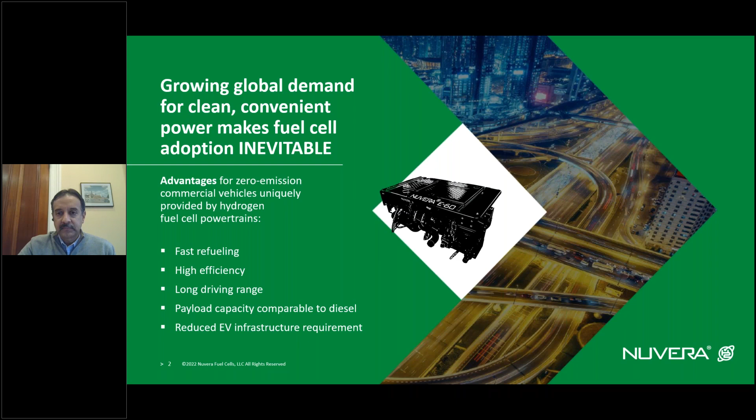The key, if you think about a fuel cell engine compared to an IC engine, is really about reliability. Today you get into your car, be it gasoline or diesel, and 99.9% of the time, it starts up - no issues. Fuel cell technology is a bit temperamental, so the key in the industry is really, can we match the reliability of an IC or diesel engine?

So if you think about hydrogen fuel cell engines, this is what we make today. Think about hydrogen as portable electricity. Hydrogen is carried as a fuel, like petroleum and natural gas, and it's used to refuel a fuel cell vehicle in the same amount of time as it takes to refill a diesel vehicle.

Compared to batteries, hydrogen has much more energy density, and as a result, electric fuel cell vehicles generally have a greater range than battery vehicles.

What you see here on the right-hand side is what we call the Nuvera fuel cell engine. Fuel cell engines are measured in kilowatts, and this is an example of our 60 kilowatt engine. Think of this as the engine block in your car. If you took your engine block out, or built a vehicle with a hydrogen fuel cell engine, you would still have to add the radiator or thermal management, a battery, and all the control systems that go with the vehicle.

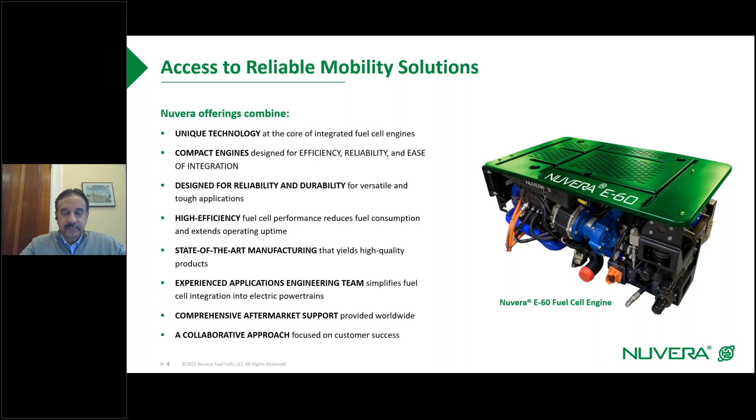So a bit of history again about Nuvera. Founded almost 22 years ago, we have over 800 patents in fuel cell technology, and we've done a lot of projects over the years, from several automotive vehicles to buses to tractors. Today our technology is commercial in forklift trucks around the world. We have a bus that's running in China and one shortly to be running in India. And then we're focused on ports. The reason we're focused on ports is that's where a lot of diesel is used today, and it's a very ripe opportunity to go to zero CO2.

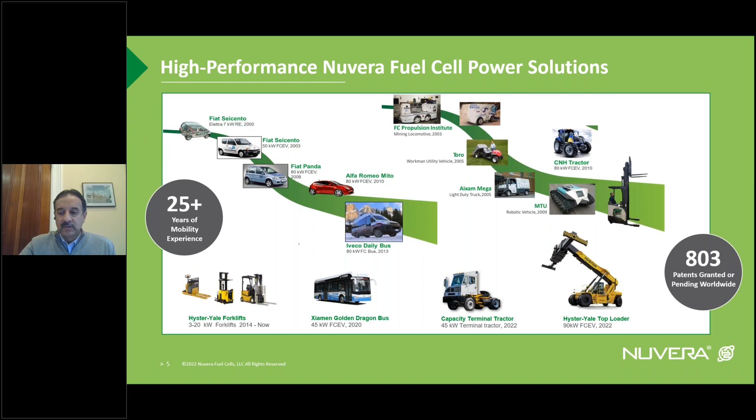Nuvera is a global company. We're part of a $3 billion US company called Hyster-Yale, a world leader in material handling, so forklift trucks and equipment that's used in ports. Nuvera is headquartered in Boston, where we have our manufacturing. In Europe, we have an engine testing facility near Milan. And we have application development and technical service in China. As part of the Hyster-Yale network, we have a full dealership network that we can leverage around the world to support customers.

So I wanted to get into why hydrogen for transportation, right? This is an important thing. Hydrogen based fuel cell technology is currently generating significant interest across multiple industries, as companies worldwide look to lower the carbon footprint of their operations, due to internal goals, stakeholder demands, and regulatory pressures to reduce CO2. In addition, hydrogen is the lightest element and the most abundant chemical substance in the universe. In standard conditions, it's present as a gas of diatomic molecules consisting of two hydrogen atoms, and is a highly flammable substance that can be used directly as a fuel to generate electricity in fuel cells.

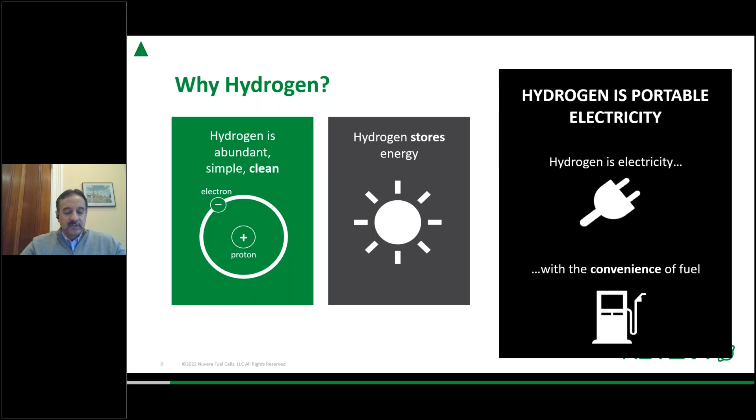Today, electricity is an energy carrier. Electricity can be made from many diverse feedstocks, from solar to nuclear to hydro to natural gas and coal. Today, electricity is primarily for stationary applications, so for powering our homes and our factories. Electrical power is distributed through a grid to homes, businesses, and factories. For many uses such as electronics and other devices that don't require a great deal of power, batteries are the practical energy storage device today. But for larger applications like vehicles, long recharge times and low power density make their use on industrial equipment, trucks, buses, and automobiles limited or impossible.

Petroleum is the dominant energy source in our world today for transportation because it's energy dense and it's portable. We all know, and we've all heard stories of the oil embargo, the energy crisis. However, the fossil fuel era is coming to an end. Not only are coal, oil, and natural gas becoming scarcer and more difficult to extract, but their extraction and use are taking a tremendous toll on the environment. So what are the best clean transportation options emerging now?

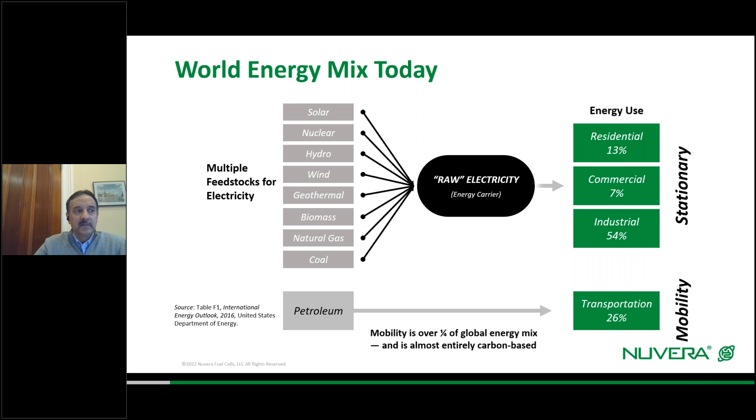So in terms of hydrogen, hydrogen is an alternative energy, as I mentioned, and there are various types of hydrogen. If you think about hydrogen today, the most prevalent use of hydrogen is in the refinery industry, for refined oils, and also in the steel industry. It's also good to differentiate the various types of hydrogen that industry is working on today. The most prevalent today is what we call gray hydrogen. It comes from the cracking of natural gas, called SMR, steam methane reformation, where steam and methane are combined under pressure to generate hydrogen. This releases the greatest amount of CO2 in the world today.

So in terms of what's the best technology today - if you think about the challenges the industry has, charging your battery-powered vehicle is 20 times slower than using a hydrogen charging vehicle. The convenience penalty for using electric vehicles can be represented as time spent charging the battery divided by time spent using it for its intended purpose. The convenience penalty for a gasoline-powered vehicle is about 0.5% - you can drive a mid-sized car about 16 hours for the 5 minutes it takes to fill it up. Battery electric vehicles have a much higher convenience penalty.

The best superchargers today have 100 kilowatt capability. That makes the convenience penalty for charging a mid-sized car about 10%, which is 20 times higher than for a gasoline-powered car. The penalty is even higher for a large SUV, most prevalent today in North America. Most EV owners don't have access to superchargers - they charge their car at home or at work. For a 240 volt charger, the convenience penalty is 100%. For a 120 volt charger, it's about 1,000%.

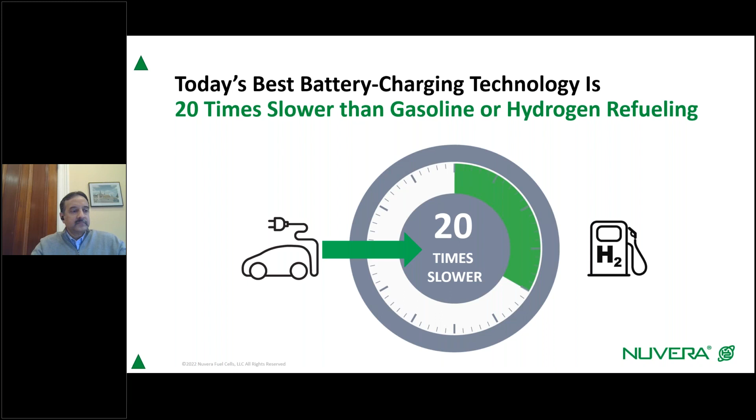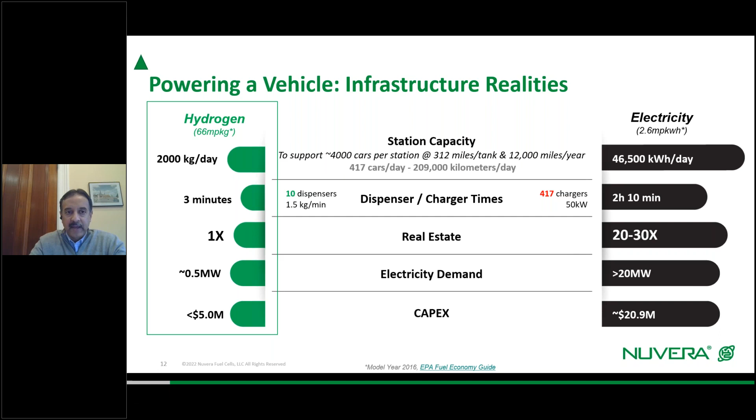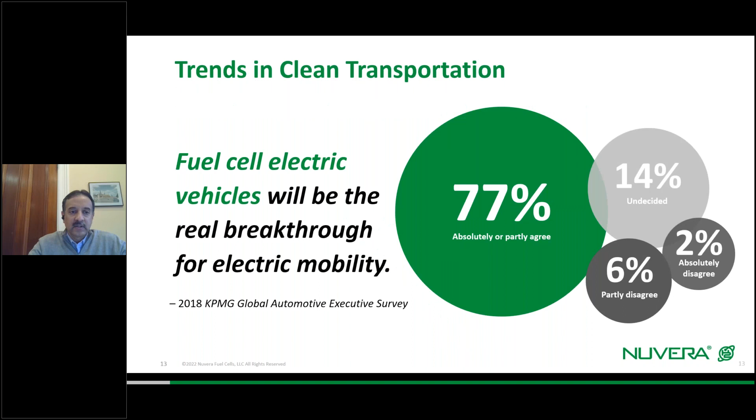So trends in clean transportation: basically the fuel cell vehicles could be a real breakthrough for electric mobility, and mostly people agree to that. So considering hydrogen mobility needs, which direction would we be moving in? Zero energy emissions.

Hydrogen can be produced from unlimited sources, as I mentioned, and it has zero tailpipe emissions. This is really the one way the world can get to zero CO2 emissions. Electricity stored as hydrogen provides the convenience of today's transportation fuels - hydrogen refueling is much faster and more flexible than battery charging.

But today, if you think about battery charging, we still all have range anxiety in terms of where we're going to charge our car, and whether charging will be available when we need it. And why should we have to wait, versus our IC vehicle, when we can fill our tank in less than 5 minutes? These are still challenges that both the battery electric vehicle industry and the hydrogen industry have to overcome.

Fuel cell vehicles can be developed at scale today. We see that in parts of the world where Toyota, Hyundai and Honda have fuel cell vehicles on the road, and hydrogen is available. But if you look at that, you're still limited, because hydrogen is only available in those locales where those cars are sold.

There's no need to change the current vehicle ownership model. We see that happening again with Honda and Toyota, which are selling these cars through their current dealer network. It's convenient and safe, and you can refuel a hydrogen vehicle very quickly.

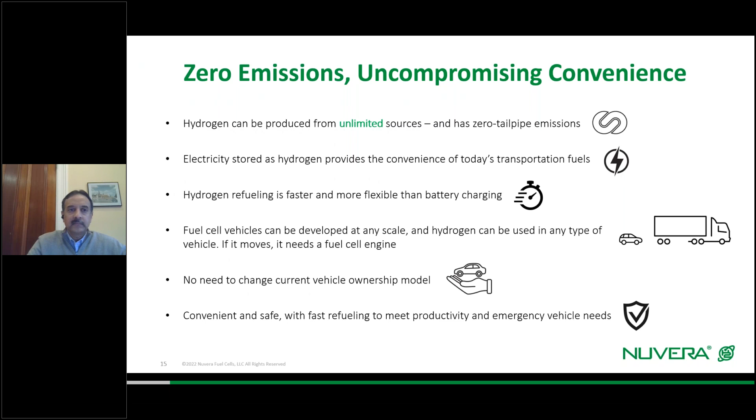Hydrogen adoption is rising - this is what we're seeing around the world today. Buses, delivery trucks, and forklift trucks constitute the first wave of deployments for fuel cell transportation. Fuel cell powered vehicles also have the potential for larger operating ranges, as well as refueling times that are significantly faster than the charging times for battery electric vehicles. With refueling times comparable to traditional diesel powered vehicles, long refueling or recharging times do not need to be designed into the daily operating schedules of equipment fleets.

What we see today in the industry is there are now over 20,000 forklift trucks operating on what we call a battery box replacement, where the lithium-ion battery has been replaced with a hydrogen fuel cell. It's captive within a warehouse or within a port location where there's accessible hydrogen, and these are being used on a daily basis and emitting zero CO2. Automotive OEMs are introducing fuel cells in China, Japan, South Korea, and in the US.

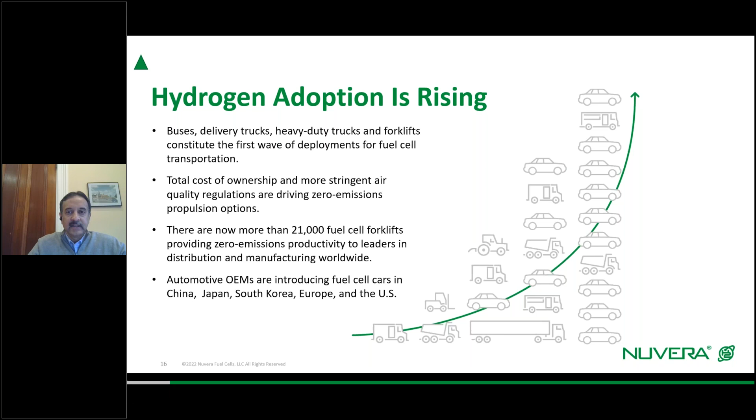Nuvera is building the hydrogen economy. We're trying to bring innovation and value with a diversified portfolio of products. We're engaged with industry associations around the world to promote the clean use of hydrogen fuel cells, and we're involved with codes and standards development. As with any chemical industry, codes and standards have to be developed over a period of time, and the industry is working towards standardization of these types of things.

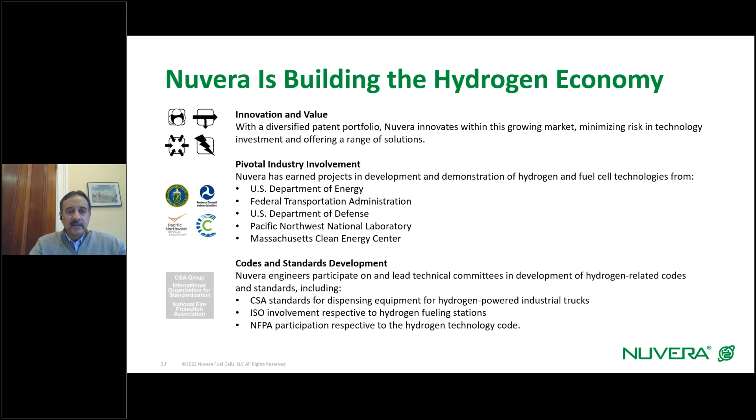Next, I want to move on to fuel cell theory - what is a fuel cell and how does it work. Fuel cell technology today is really a branch of electrochemistry, the branch of chemistry that deals with the relationship between electrical and chemical phenomena. It's a chemical reaction that happens, and it includes a number of disciplines, from chemical engineering to mechanical engineering to thermodynamics.

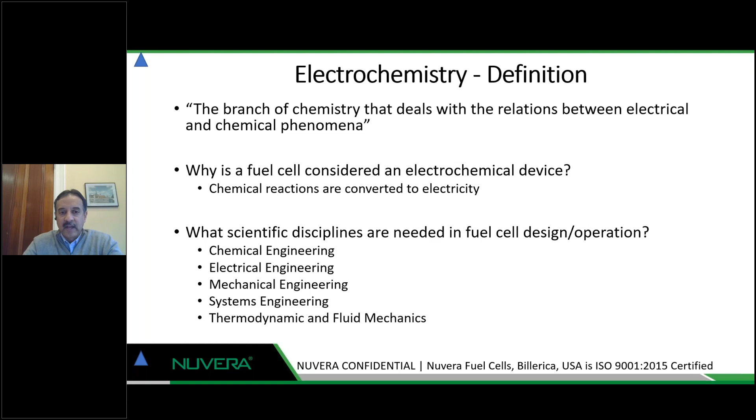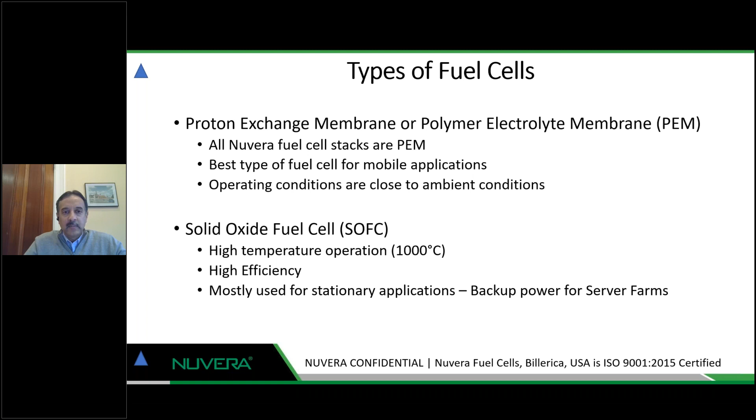Basically what happens in a fuel cell, you have a proton exchange membrane or a polymer membrane, and at Nuvera we call these fuel cell stacks. We'll go into the details of what this involves. There are two types of fuel cells: one is a proton exchange membrane that's based on a catalyst, platinum, and then a solid oxide fuel cell that operates at very high temperatures and is mostly used for stationary applications, like backup power for data centers.

So what is a fuel cell? The input is hydrogen, as we talked about - that's what's really driving the economy. So hydrogen and air are the inputs. The outputs are electricity, heat, and water. The only byproduct of a hydrogen fuel cell is water, in terms of vapor or water that's left on the ground while a fuel cell vehicle is in operation.

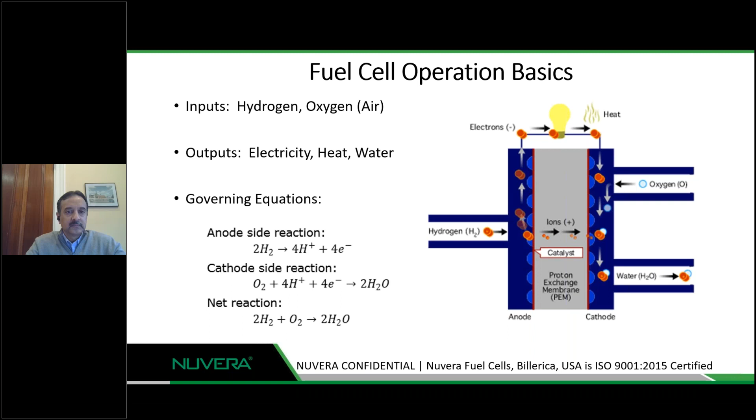Fuel cells come together under compression and pressure to increase the power output. Depending on the number of repeating components, which you can see on the right-hand side, we make fuel cell stacks anywhere between 55 cells and 383 cells. That determines the amount of power that comes out of the cell - the larger or the more repeating components, the higher the voltage. But that also creates reliability challenges, as you can imagine.

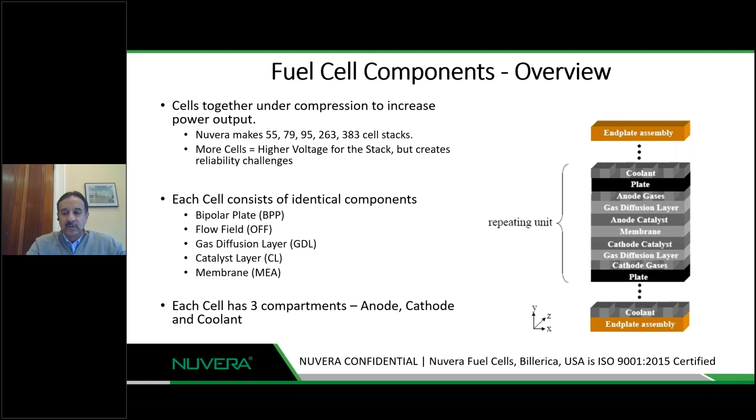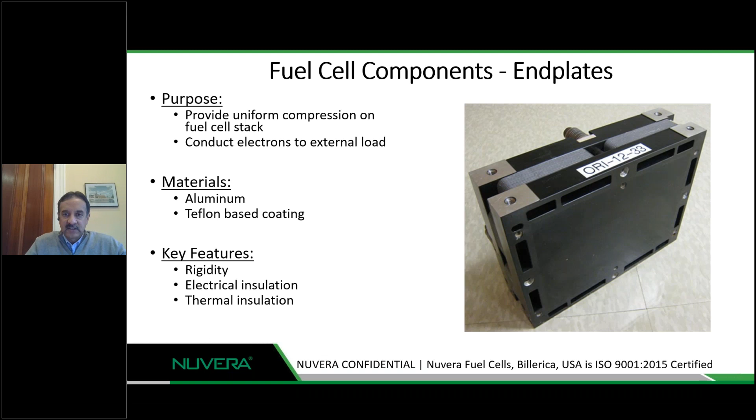Each cell consists of identical components: a bipolar plate, a flow field, a gas diffusion layer for the hydrogen to diffuse through, a catalyst layer - typically platinum, so fairly expensive - and a membrane. Each cell has three compartments: an anode, a cathode, and coolant. These fuel cell stacks are put between two end plates, which compress the fuel cell stack to allow the flow of hydrogen and air through the membrane. These materials are typically aluminum and Teflon, providing rigidity and electrical and thermal insulation. What you see on the right-hand side is a very short stack that generates about 5 kilowatts of energy, and it is about 10 times as large to generate 60 to 80 kilowatts.

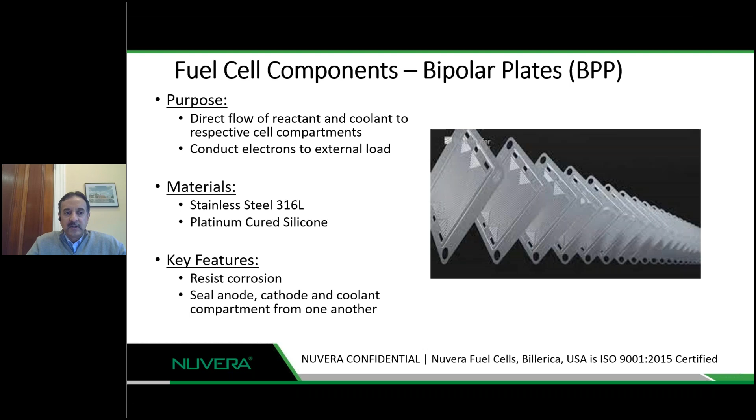The purpose of each component - it's important to understand from a technical perspective how each of these works. Bipolar plates direct the flow of the reactants and the coolants to the respective compartments within the fuel cell. These are typically made out of stainless steel, or they could be made out of carbon fiber, and they're typically corrosion resistant because you have coolant running through them, and they're sealed.

Open flow field - this is to diffuse the gases or the reactive gases from when the hydrogen reacts with the platinum catalyst. These are typically made out of nickel, chromium, and/or graphite. The purpose is to maintain the permeability of the compressed stack under pressure, to avoid corrosion, and to have low bulk and interfacial resistance.

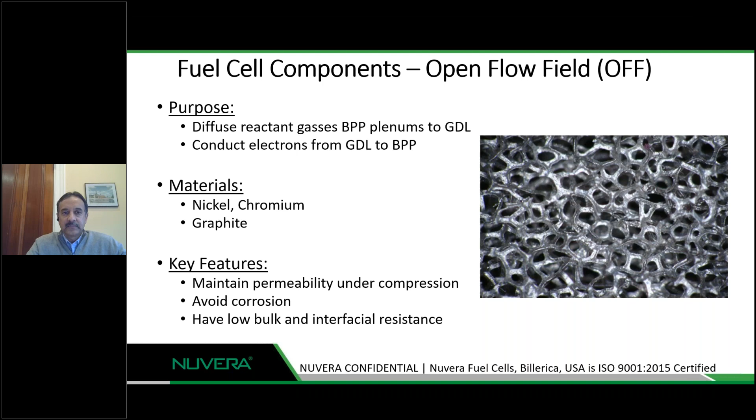Fuel cell components - gas diffusion layer. This is an important component because it diffuses the reactants from the flow field to the catalyst, and it conducts the electrons off the catalyst to generate current. These are typically made out of Teflon or carbon fiber, and they're used to prevent the puncture of the MEA.

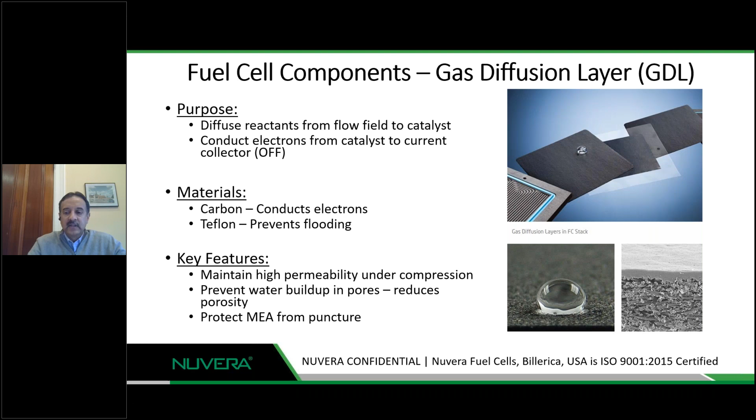And then finally, the catalyst layer. The purpose of this is to facilitate the reaction between the anode and the cathode. And these are typically made out of platinum, carbon, or Teflon.

So as you can see, many of the components that are used here are fairly expensive, and the typical cost of a hydrogen fuel cell in terms of dollars per kilowatt is in the range of $1,000 per kilowatt, all the way up to about $1,500 a kilowatt. So something that is a 10 kilowatt stack could cost $10,000, and if you're at 60 kilowatts, it could be almost $70,000 to $80,000.

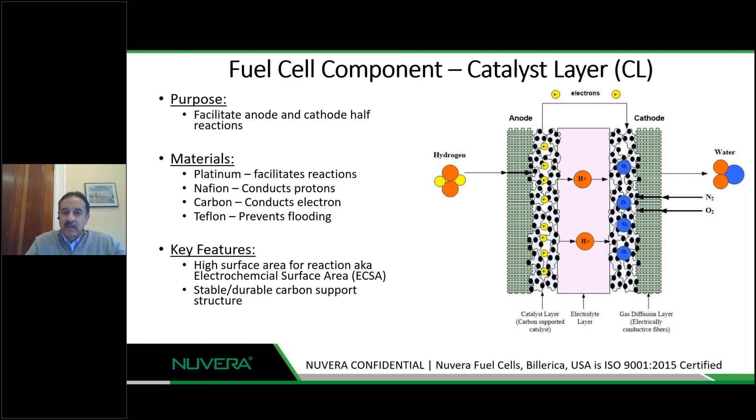So this is a fairly expensive technology, which is one of the barriers that I think people have today with adopting the technology. And then the fuel cell membrane.

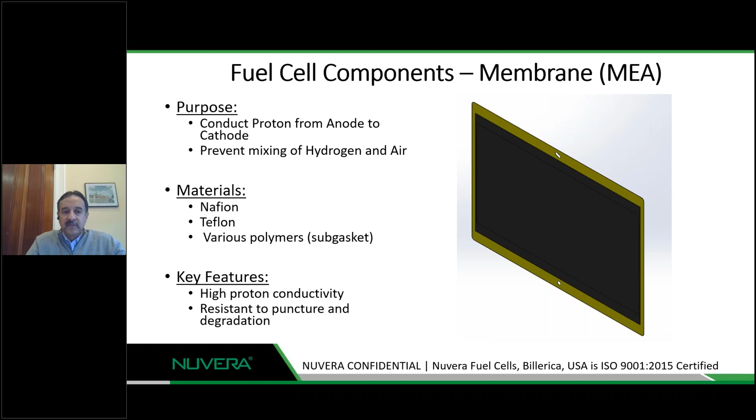The purpose is to conduct the proton from the anode to the cathode. It's also used to prevent the hydrogen and the air from mixing within the fuel cell components. And again, these are made up of Teflon and various other types of polymers, and they're used to prevent puncture and degradation.

And then in terms of measurement, what's measured, the typical way of measuring a fuel cell stack is what we call a polarization curve, which shows the fuel cell output voltage over its entire range of current density. Our cells today are designed for between 0 amps per centimeter squared up to 2.5 amps per centimeter squared.

And there are three types of fuel cell losses. You get activation loss, ohmic losses, and mass transport or concentration loss.

And typically the efficiency of the fuel cell compared to a diesel engine: a diesel engine is about 30 to 35% efficiency, which is the conversion of the amount of diesel that you put into the engine to the amount of power that you get out. In a hydrogen fuel cell, you can get anywhere from 58 to 65% efficiency. So the conversion of hydrogen is much higher in a hydrogen fuel cell than a diesel vehicle.

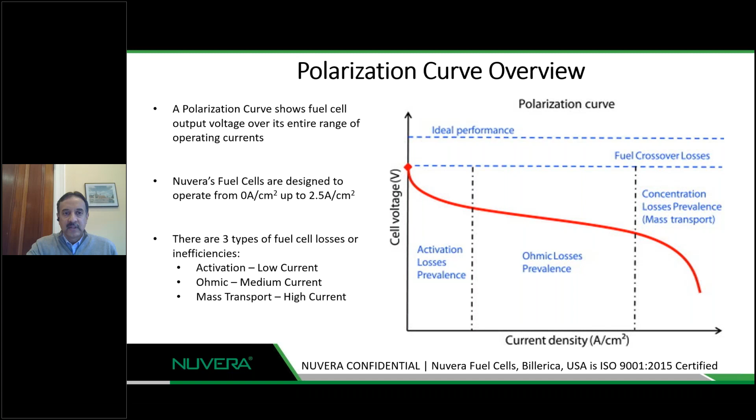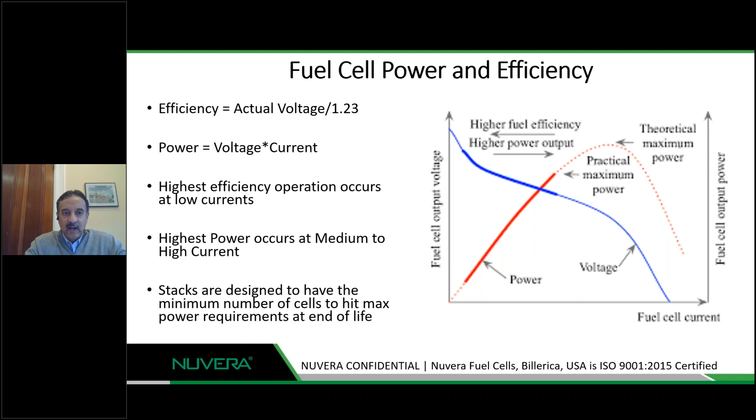And then power, fuel cell power and efficiency is measured over time. The highest efficiency operation occurs at lower currents, and the highest power occurs at medium to high currents. And then fuel cell stacks are designed to have minimum number of cells to get the maximum power. So the more repeating components or cells in the stack, the higher the power, but also the challenges of reliability and operability with the system.

And then fuel cell stack aging: as you can imagine, because the fuel cell stack uses a catalyst, what happens over time is the catalyst is used, so you have stack durability issues with current density. As current density increases, the cell voltage decreases, and the power of the fuel cell will decrease over a period of time. And when I talk about time, that could be operable time of after 4,000 or 5,000 hours. Most fuel cell stacks today are built to operate about 10,000 hours or more.

So think of a fuel cell stack in a vehicle as a consumable, like your oil filter. After a period of time, because it's still emerging technology, you'll have to replace the fuel cell stack after 8 to 10,000 hours, depending on your operating conditions.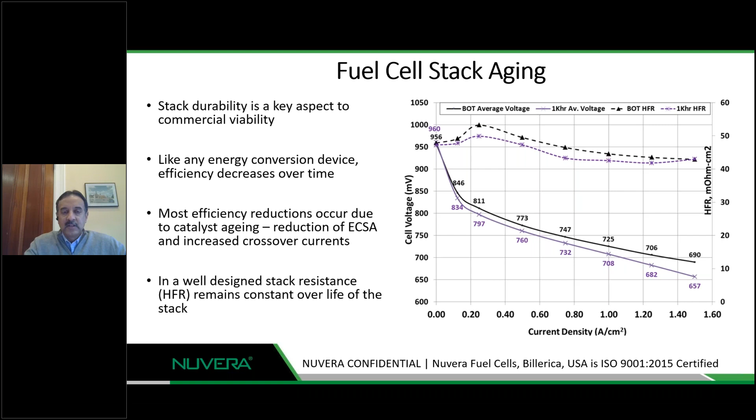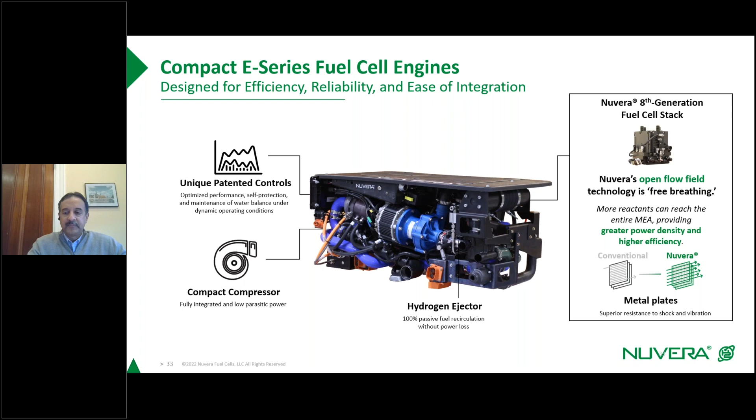In terms of cost of ownership, fuel cell-based vehicle solutions are also complex systems that require a sophisticated array of control, cooling, and auxiliary equipment around actual fuel cells. If you think about your automotive engine today, that basically is running on software. So there are a lot of software systems that run the engine, and the same with the fuel cell system. You need software to run an engine. A hydrogen fuel cell cannot therefore be simply slotted into an existing battery vehicle.

Much of the technology is still far from mass market adoption. So the maturity, reliability, and the performance of each component needs to be evaluated with particular care for mobile container handling machines and other applications. Finally, comprehensive industry standardization in terms of hydrogen vehicle refueling is still in development.

In terms of cost, what we see today as a benchmark, if a city bus costs $100,000, a battery-powered vehicle of the same size would be about $200,000, and the total cost of a hydrogen hybrid fuel cell bus would be about $300,000. So it's almost 3x the cost of a diesel-powered bus today. And that is the challenge that the industry continues to face.

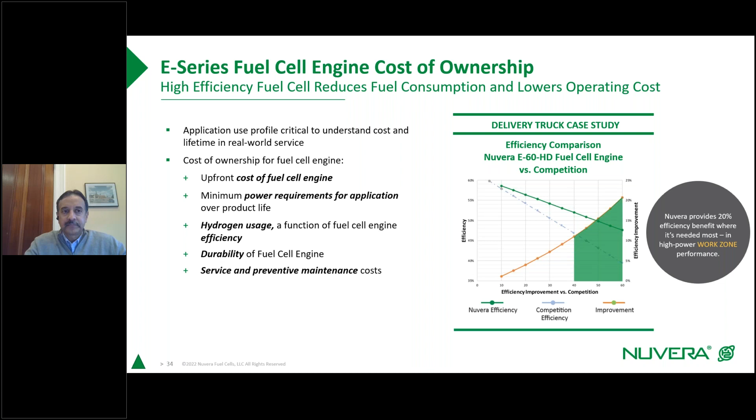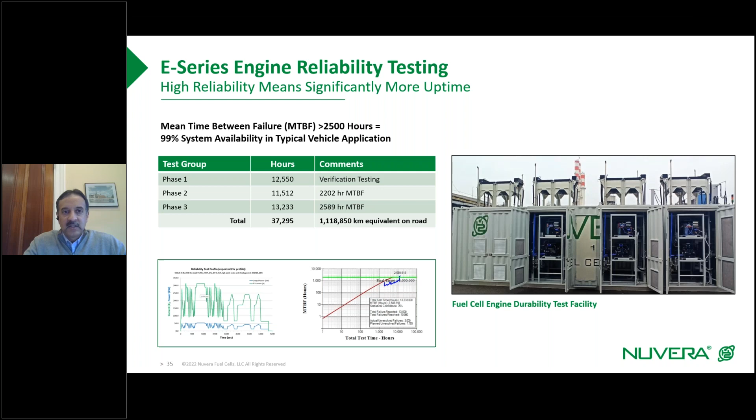So Nuvera has a testing facility in Milan, and what we do today is test engines and certify engines here. Our engines have run an equivalent of over 1 million kilometers on the road in our testing. This gives the customer some confidence that the product will work.

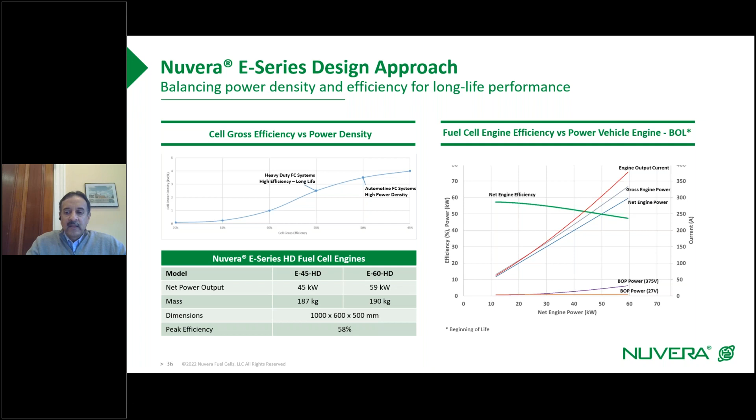Our design approach balances power density and efficiency for long life performance. We make 2 products today: a 45 kilowatt engine and a 59 kilowatt engine. I'll discuss some examples of where they're used and operating today. It's a fine balance between the net engine efficiency and the power you get out of the engine.

If you think about the technology today, it is moving along a path of adoption. First, customers buy one hydrogen fuel cell engine to develop into a prototype vehicle that typically runs around the city for a period of time, and they look to generate a fleet after that. To make it successful for our customers, we provide applications development and customer support, training, aftermarket service for parts, and other things to bring the customer up to speed.

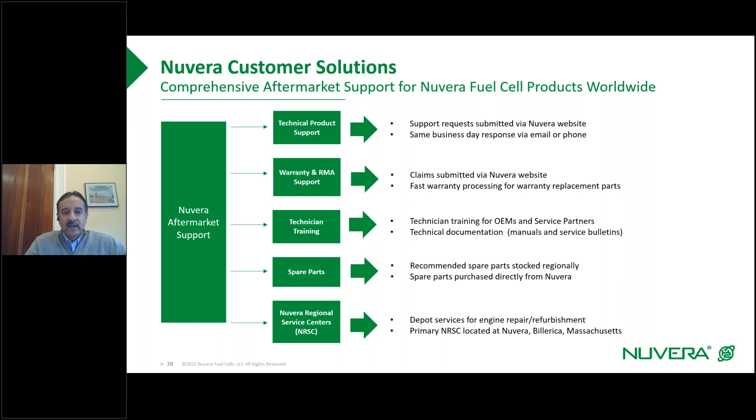Nuvera provides a whole list of comprehensive customer solutions, from technical support from when you contact us, to warranty and support. Just like the diesel vehicle or automotive market, our model mimics the service model of the automotive or trucking industry to support vehicles in the field today, from aftermarket service and parts to technical training to service centers around the world.

So the big question is, where have hydrogen vehicles been adopted today? As I said in the beginning, in the material handling industry there's over 20,000 forklift trucks operating with various types of battery box hydrogen fuel cell engines. The bus market is fairly mature in places like China and Europe, where there are over 2,000 hydrogen fuel cell buses operating today. India has about 3 hydrogen fuel cell buses that are in some degree or shape of being put on the road.

Other applications for hydrogen fuel cells include delivery trucks and refrigerated box trucks - good examples where, though there's no infrastructure to drive long distances, most or all of these trucks return to their home base at night. A bus goes back to a depot, either to be charged today or refueled with hydrogen. Another application is stationary power, used as a backup generator where the hydrogen fuel cell charges the battery and can be recharged in less than 10 minutes with hydrogen.

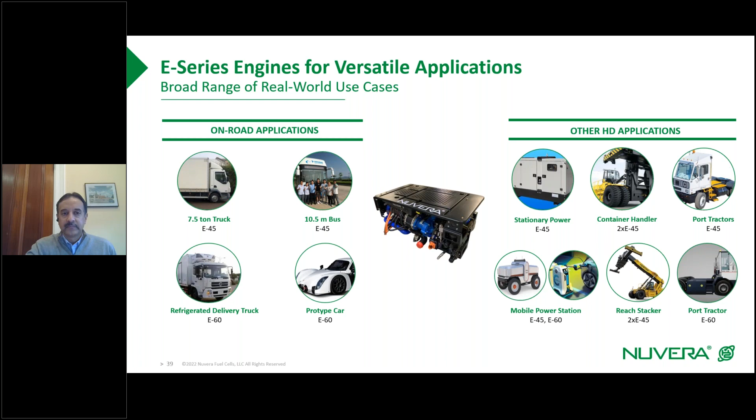We have robust manufacturing. One question we get is, can we make hydrogen fuel cell products and deliver them to our customers? The answer is yes. We have a factory in Boston that can make 2,000 hydrogen fuel cell engines annually, and we're ISO certified. The technology has advanced to the point where it's commercial today - not only us, but several competitors and other companies around the world are producing product and going into vehicles as we speak.

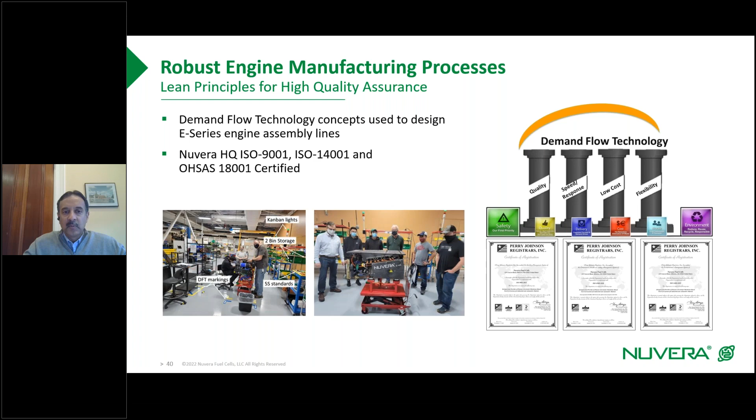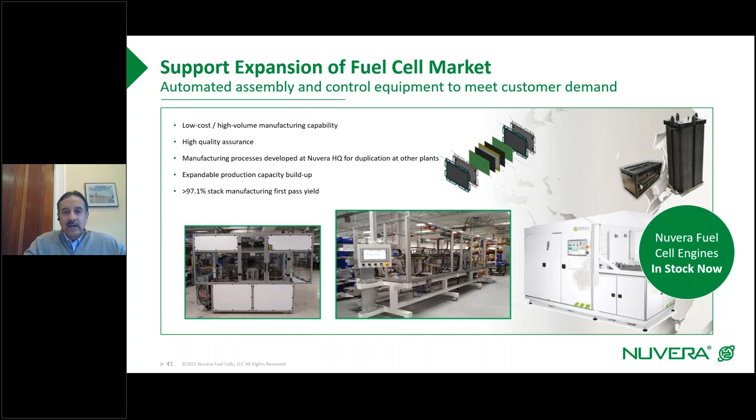Fuel cell stacks are made automatically. As you can imagine, it requires a clean room to do this, and we have a machine that produces fuel cell stacks automatically.

Finally, to wrap up, there have been decades of research and development done in terms of hydrogen and hydrogen fuel cells. The time is now where it's being adopted around the world. We can see adoption moving very quickly in China, and in Europe, where the EU is building out hydrogen infrastructure in EU countries. We can see in India, during Energy Week this week, Prime Minister Modi declared India will become the world leader in hydrogen. There is a lot of energy, both from the public sector and private sector, billions of dollars being spent on infrastructure and driving demand.

In the US, we see that it's much slower - we are behind the rest of the world, but soon to catch up. At Nuvera, our motto is let's move the world together. Thank you.

Oh, thank you very much, Kedar. It's a really very informative presentation. Very useful and a lot of learning about hydrogen fuel cells.